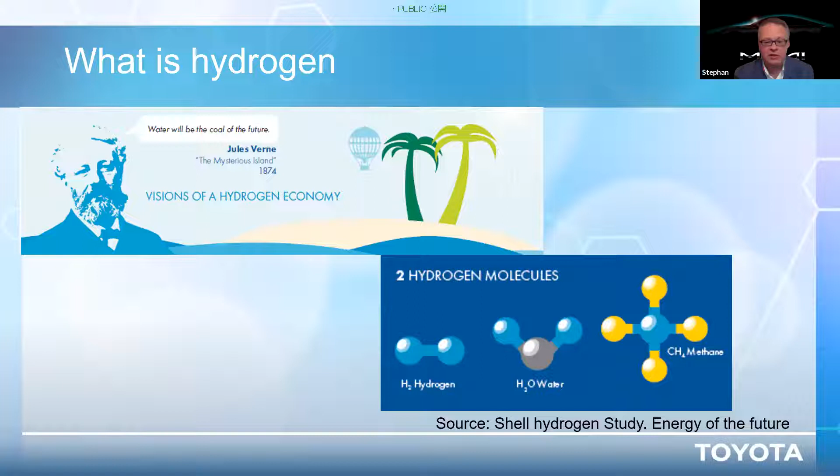Now hydrogen, what is it? As you can see in these chemical elements, H2. You can produce it from water, which is H2O, or from methane, which is CH4. So hydrogen is really plentiful available, and it's the most abundant element actually on Earth. That is why it makes it so attractive to utilize this as a future energy carrier.

When we look into different ways how to produce hydrogen, I will not go into all these pathways, but just to say you can utilize hydrogen by separating the oxygen from water, H2O, through an electrolysis process, which requires electricity, and this electricity can come from renewables, from biomass, or of course also from fossil fuels. Then there is some biochemical conversion possibility based on algae, and the most common, I would say today, is the thermochemical conversion with SMR or other techniques by using fossil fuels, producing a syngas, and out of the syngas hydrogen. So these are in essence the different pathways to produce hydrogen.

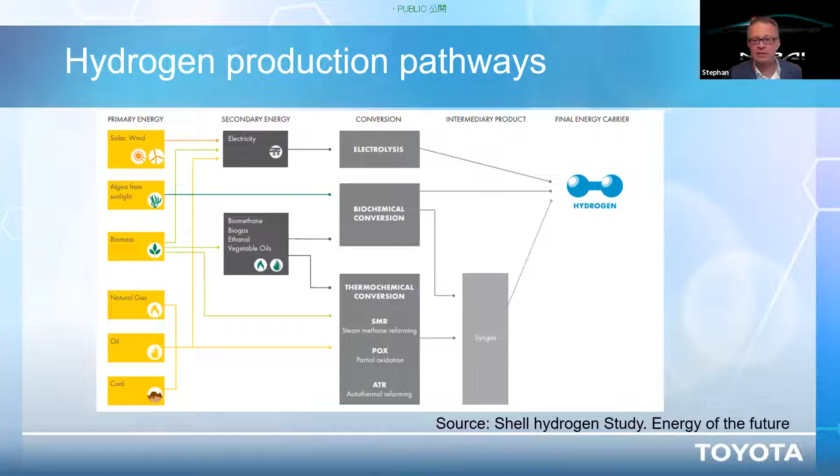What is important to note is that hydrogen is an energy carrier. It is not an energy by itself, it carries the energy, and it releases electricity and power when it reacts again with oxygen.

There are different colors of hydrogen. You might have heard gray, blue, green, red. Gray hydrogen is the hydrogen available today, a large majority. This is hydrogen based on natural gas, on fossil fuels.

Then we talk about blue hydrogen when we use fossil fuels, for example natural gas, but we capture the CO2 out of this process in a carbon capture utilization or carbon capture storage process. Last but not least, green hydrogen is when we really use biomass or green electricity to produce hydrogen with an electrolyzer. And red hydrogen is hydrogen that is coming from nuclear.

In the Hydrogen Council, we have made a forecast about the development. As I said, today mostly gray hydrogen is available, but it's clear if we want to decarbonize, we need to move into a blue and a green hydrogen scenario. And this is what we came up with. Our analysis shows that you could do a completely 100% blue hydrogen future.

There is sufficient storage capacity worldwide available. And you could also do a 100% green hydrogen economy because there is sufficient renewables, sun, space available. The decisive factor is the cost, and it is most cost effective to have a mixed case between blue and green to capture, to utilize the regional circumstances.

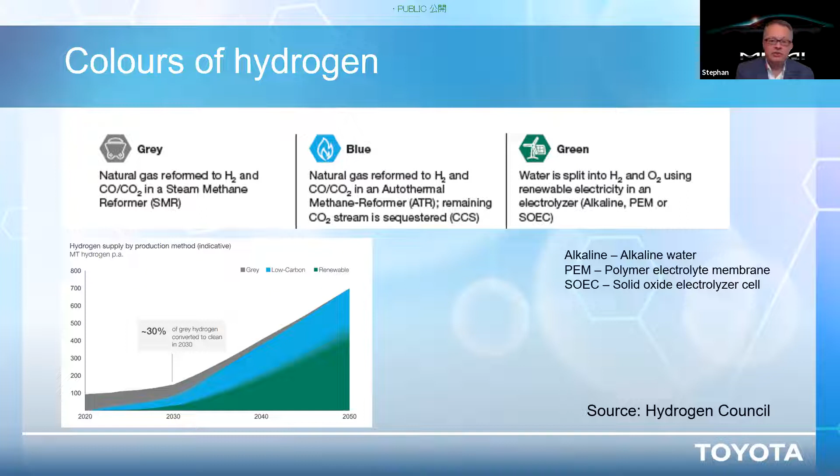If you're in Saudi Arabia, you have lots of sun, lots of space, then green or blue hydrogen might make sense. In other areas, it is more blue or it is more green. It really depends on the energy that you have available.

What are the benefits of hydrogen? As I explained, it has the potential to be zero carbon footprint when it is produced from green or when it's utilized as blue hydrogen. It can be stored, and hydrogen can be transported over long distances, for example from the Middle East, from Norway, from Australia, from Chile. It has a high energy density, up to 100 times higher than lithium. It provides clean power and it provides clean heat. And last but not least, it is also a sector coupling effect.

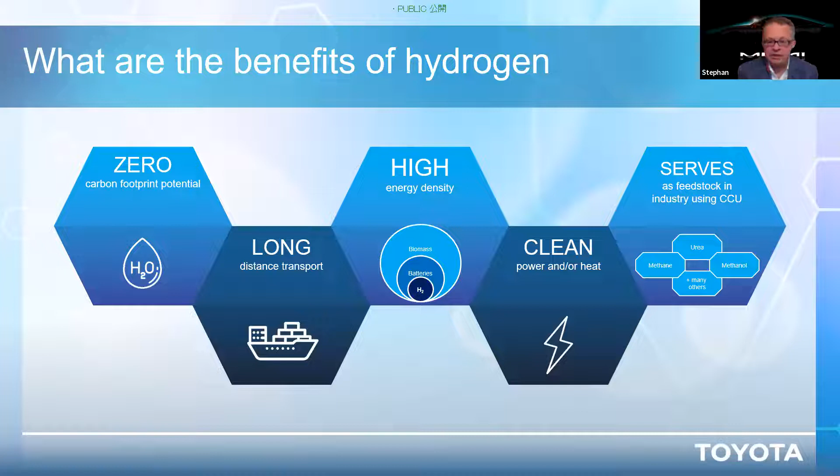It serves as a feedstock in many industries, including carbon capture and utilization.

Now let's move to the vehicle itself. What is a fuel cell vehicle? In essence, it is an electric car because it is powered by an electric engine. The difference to a battery electric vehicle is that the energy is not stored in a battery, but in hydrogen, the energy carrier. We store hydrogen at 700 bar, and you can see here the yellow tanks. The new Mirai has 5.6 kilograms of hydrogen, giving it a driving range of more than 600 kilometers.

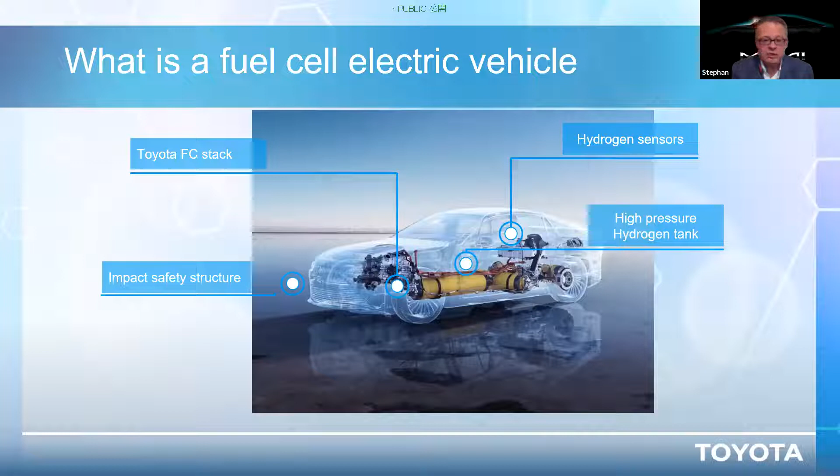Let's look at the difference and similarity between a fuel cell stack and a lithium battery, as you can see here. On the left side is a fuel cell stack. What does it do? It uses hydrogen and utilizes oxygen from outside, which is plentiful available. Hydrogen reacts in the stack with oxygen, a chemical process releasing a lot of heat and electricity, which we then utilize to power the electric motor. On the right side is a lithium battery. It looks similar and the physics aren't so different, but the main difference is that electricity is stored in the battery itself, not externally in tanks, and then utilized in an electric motor.

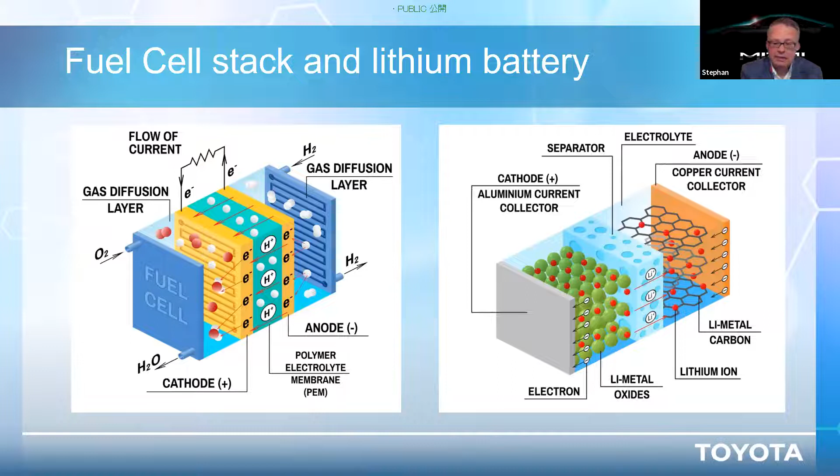Now you can start to play around with these two elements. On the right side is a fuel cell dominant system, where the power for the electric motor comes mainly from the fuel cell. The Mirai has a 128 kilowatt fuel cell providing power directly via a converter to the electric motor. On the left side, we have variants called range extenders, which we utilize for example for buses. Here the main power comes from the battery, and the fuel cell is constantly charging the battery. Between these two extremes, you can play around with battery size and fuel cell size to come to different solutions.

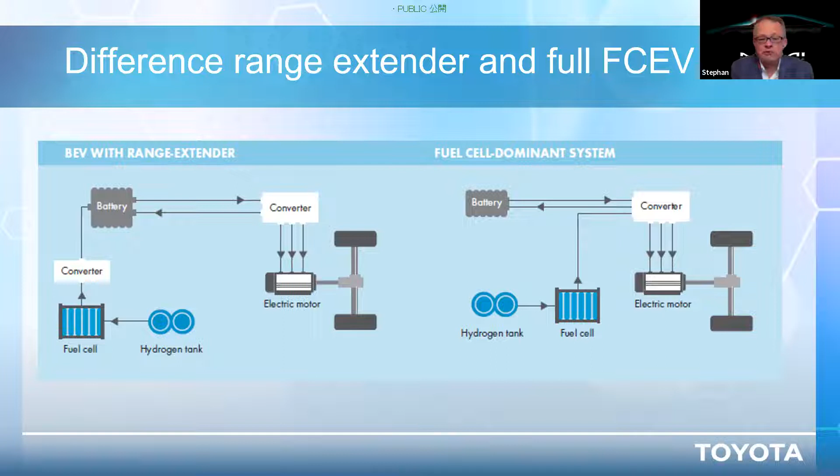Now let's turn back to hydrogen and the complementary role of both. Both have advantages and disadvantages. Hydrogen's disadvantage is lower energy efficiency, and it requires a dedicated infrastructure and distribution network. On the positive side, it has fast charging possibilities. The Mirai refuels in 5 minutes, and the target for buses and trucks is 10 minutes, very comparable with conventional options today. Hydrogen also has high energy per mass, which is why in vehicles where space and weight are constrained, we can store a higher amount of energy with hydrogen than in lithium batteries.

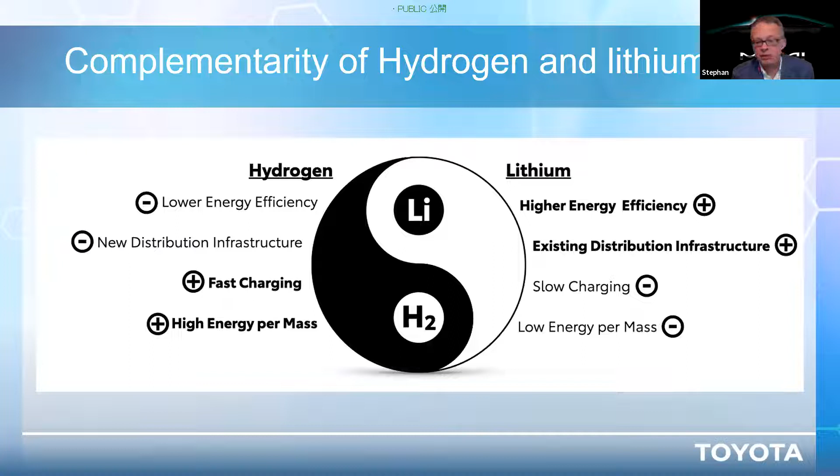Lithium, on the other side, has higher energy efficiency in vehicles, and the distribution infrastructure is easier to realize at the beginning. I say at the beginning because as soon as we go into volume and wider fleet applications, we'll see grid issues and grid upgrades required. The downside is slow charging, and the energy per mass is also lower than in hydrogen. So it's not either-or, it's both. That's the message, and we need to understand customer requirements, whether a customer goes for hydrogen or lithium batteries.

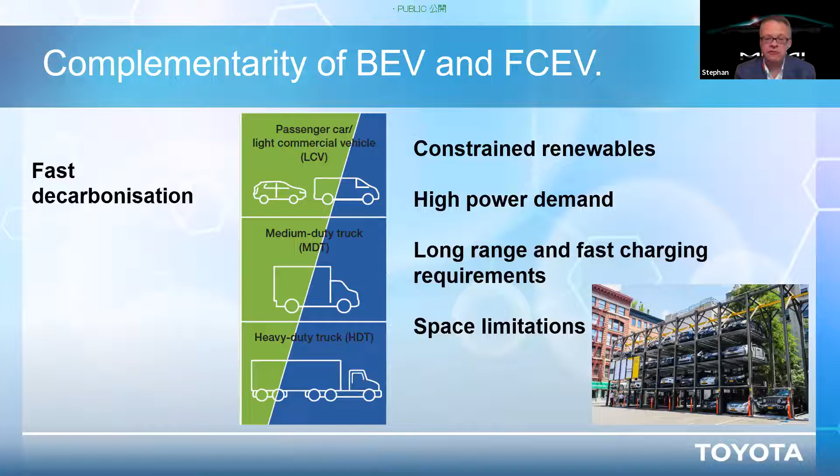To summarize, we just published in the Hydrogen Council a dedicated study on transport. We need battery electric vehicles for fast decarbonization, and they will dominate in many use cases, especially passenger cars, less so toward heavy duty trucks. Fuel cells have a clear advantage when there's a constraint of renewable availability, high power demand—think trucks or buses—or long range and fast charging requirements, such as taxi fleets or ride-hailing applications. Or, as in this picture, simply when there are space constraints that don't allow overnight charging. Here fuel cell has a clear advantage.

Looking at the global picture, we see an environmental revolution going on, also with the results and steps taken in Glasgow. In total, we now have countries representing 75% of global GDP who have committed to zero emissions or who have or will introduce carbon trading. This is a massive trend.

That's also obviously a question: how can we decarbonize transport? The transport sector today accounts for more than 20% of final energy consumption, and even worse, we still depend more than 95% on fossil fuels. So it's a huge challenge to decarbonize this sector.

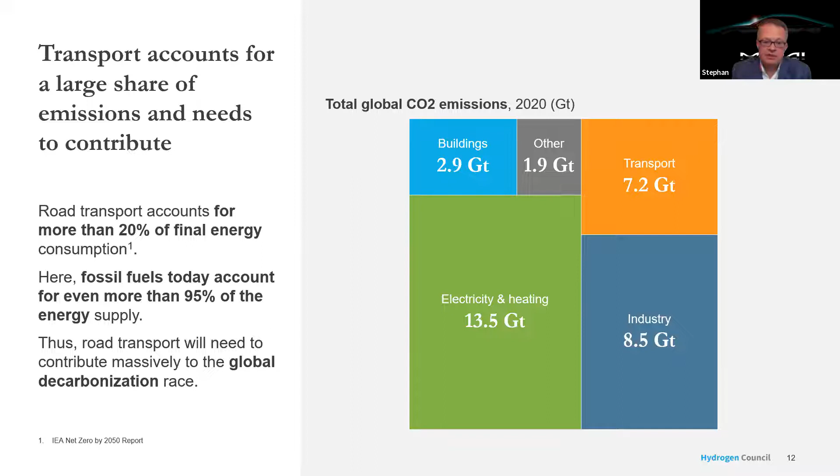Looking forward, we try to make a forecast for what happens by 2030 and by 2050. What you can see on this slide is power in black, mobility in blue, heating, and new industries. New industries is specifically the steel industry, which has increasing interest in utilizing hydrogen. Existing industries is mainly the chemical industry, which uses hydrogen today to produce fertilizer or in refineries.

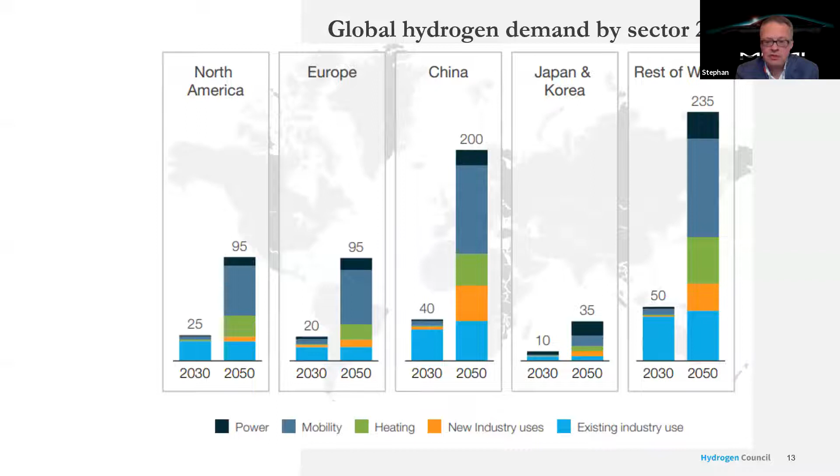Looking forward, what becomes clear is that hydrogen will play a major role in mobility. Our forecast clearly shows that hydrogen uptake in mobility will be quite significant towards 2030, but even more so in 2050. Let's have a closer look at what happens between now and 2030.

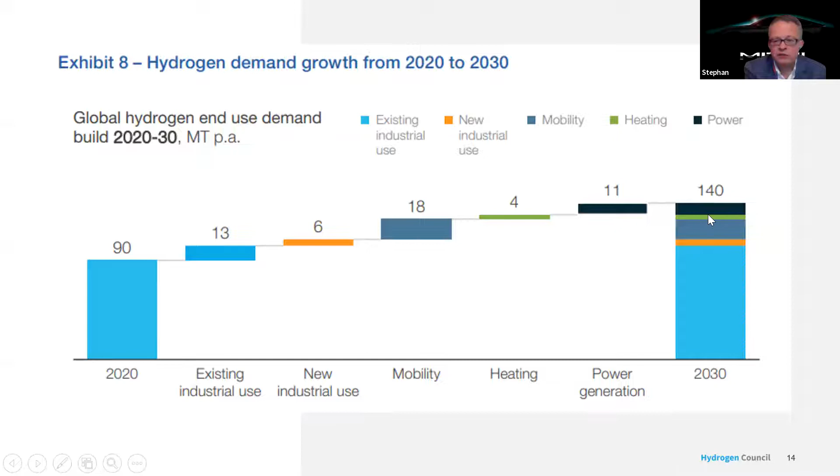The starting point is that today we produce around 90 million tons per year of hydrogen. There will be an increase of existing hydrogen usage - think about refineries who need more hydrogen in the future, then steel industry as I mentioned. Mobility is developing many projects, and then the heating and power sector, leading to a consumption and production of 140 million tons by 2030.

If we look at what is required in terms of global investment to make this happen, here again you see the different sectors and the investment needed for production, distribution, and also for the demand side. What's clear is that for transport, we need almost equal investment in production, but as transport is very decentralized, we also need significant investment in distribution and in setting up a hydrogen network, and then also for the vehicles.

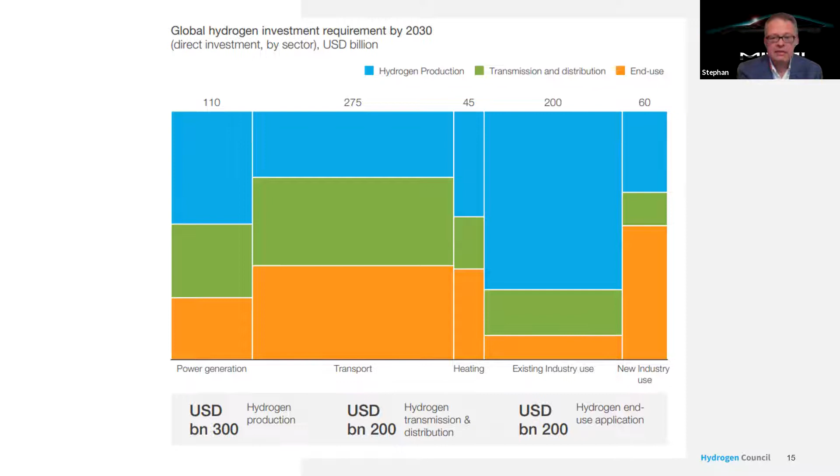We now have the Mirai, the truck - Ash will show you the truck in the US - we have buses, we have vans. We are working on trains with partners, on ferries, on stationary applications. So the number of applications in the transport sector will increase, and hence the investment will also be significant between now and 2030.

But what we also analyzed is how much of this investment is already committed today. As you can see, committed or announced is around $160 billion US, but we still have a significant gap to close to reach the investment needed, which is around $700 billion by 2030 for production, distribution, and end-use applications. So discussions are ongoing.

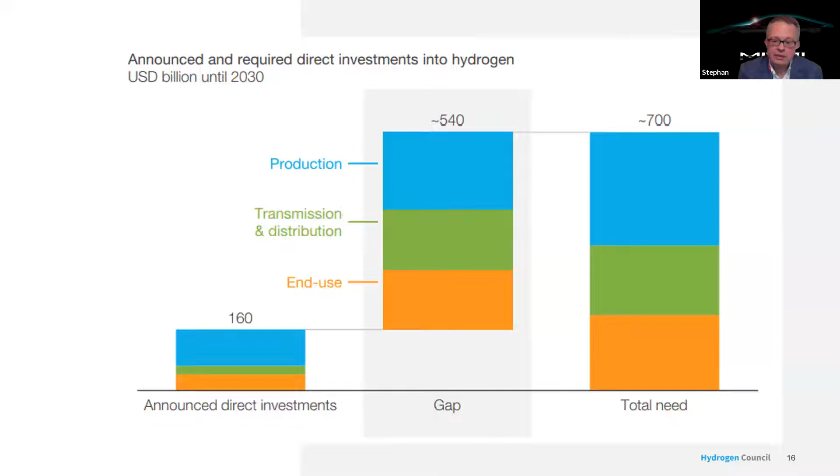European and US have now put big incentive plans for hydrogen on the table to promote this, to stimulate financial mechanisms, and the financial industry is playing a key role in this regard to unlock this investment and make this happen in order to realize the full potential of hydrogen.

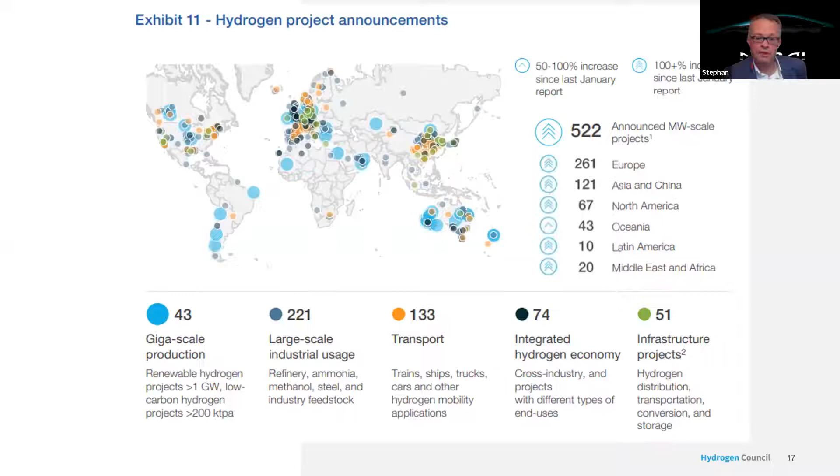And in China. But Europe is currently leading with around 261 large-scale industrial projects currently going on in Europe, for example as part of the so-called IPCEI projects - projects of common European interest. So it is the clear target of the European Commission and many member states to make hydrogen a fundamental part of the new economy, one we'll see decarbonize and reach the Paris Agreement.

Now let me turn towards transport and why we think battery electric and fuel cell have a complementary role to play. We have developed in the Hydrogen Council 12 facts around this complementary role, summarized in 3 areas. We believe in this complementary world we can decarbonize greener, we can be faster, and we can be cheaper.

The key arguments on greener: system efficiency is comparable, life cycle emissions are comparable, there's an additional storage and import possibility to utilize more renewable electricity, and we can actually ease the resource demand for certain materials like cobalt, nickel, or lithium that are required for battery. Faster - we are independent from the electricity mix.

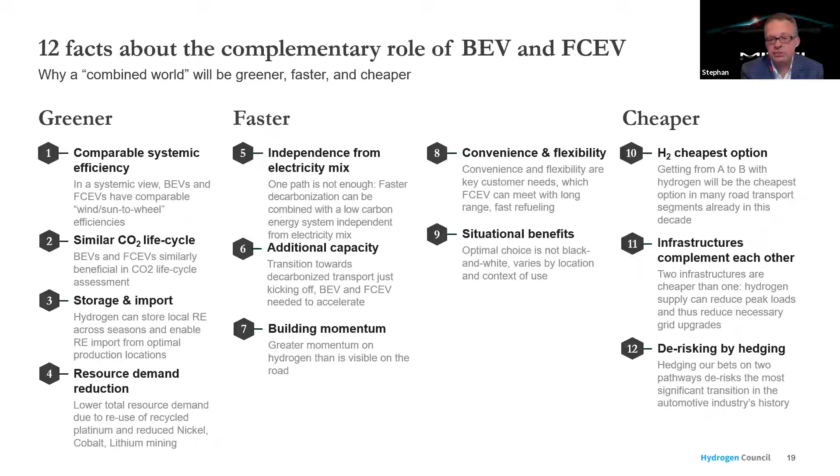We can provide additional capacity for this decarbonization transition, and we can utilize greater momentum by focusing on both technologies, because we can offer more convenience and flexibility to customers, and better respond to situational and regional situations. And cheaper - because hydrogen is the cheapest option in many situations, and the infrastructure can actually be cheaper as one. So let me not touch on all, but just on some selected items.

The first is on efficiency. Let me explain this chart. What you can see on the left side is we assumed the output of a 1 kilowatt solar panel here in Germany or Northern Europe, which has a load factor of 11%.

So the starting point is 950 kilowatt. This electricity we utilize in a battery electric vehicle. We have losses because of the transmission, and around 18% tank to wheel losses in a battery electric vehicle, which gives you 680 kilowatt, which means the car can drive 6,100 kilometers.

The next case is we take the same 1 kilowatt solar panel, but this time in the Middle East. There's more sun, so the load factor is higher, 25%, and our starting point is higher, 2,200 kilowatt. Now we cannot use the electricity produced in the Middle East in Europe, but we can produce hydrogen, liquefy it, ship it to Europe, and utilize it here directly in fuel cell vehicles. You see the higher tank to wheel losses, which we assume here at 50% for fuel cell vehicles, and despite this, we have almost the same driving range as for battery electric vehicles using solar energy from Germany.

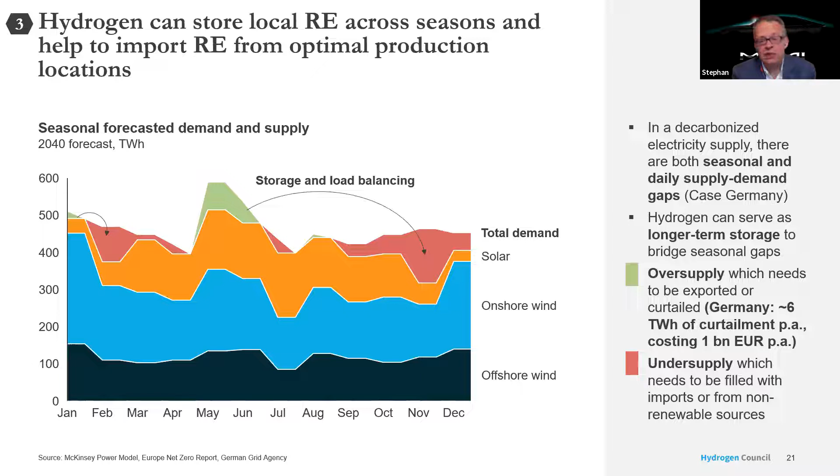This slide is just reiterating what I said about the peaks. When we have imbalances in the electric system, we have green electricity available, there's an oversupply, and this accumulates at the moment to around 1 billion alone for Germany. We also have situations where we need more electricity but there isn't sufficient green electricity available, for example during the night. So hydrogen can obviously help to balance this. We can utilize the surplus, produce hydrogen, and utilize it when energy is required, when there is an undersupply.

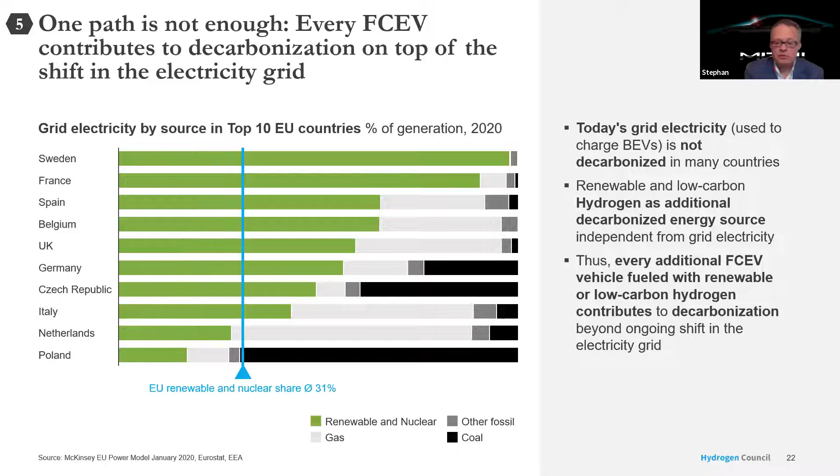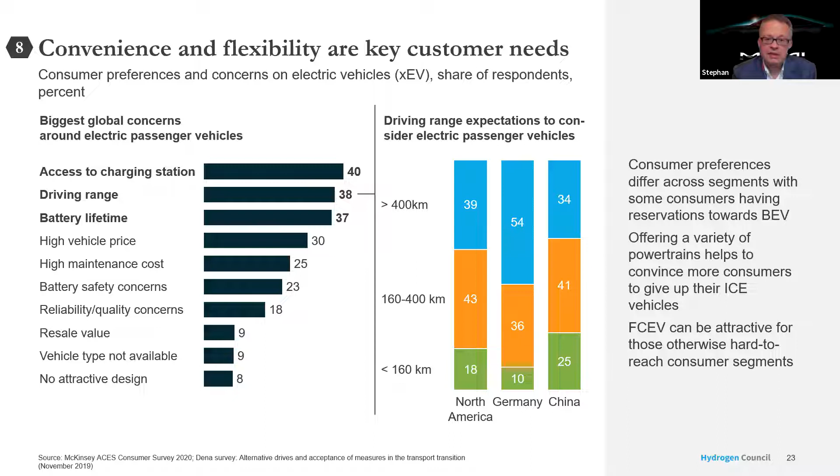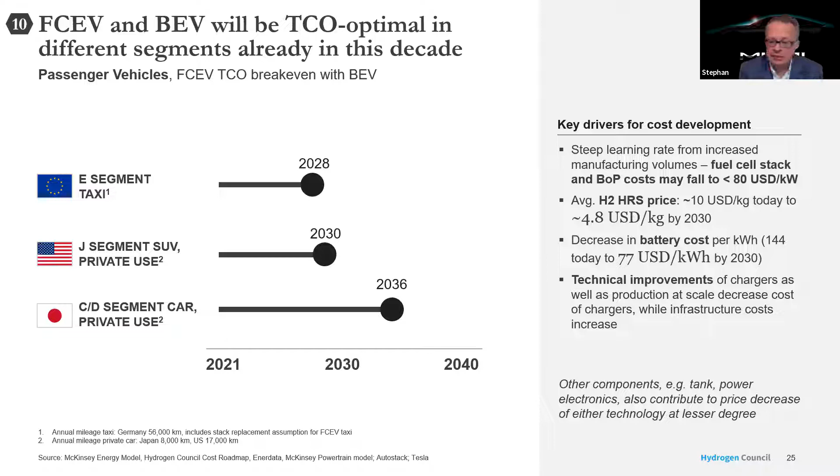I mentioned that two infrastructures are cheaper than one, which sounds a bit strange. But what we calculated is, in a world of the Paris Agreement when we fully decarbonize, for 1,000 passenger cars in a 100% BEV scenario, the investment needed for the grid and electric charging infrastructure is around 5.8 million. Now if we reduce this 100% scenario to 90%, we can already reduce this cost by 1.4 million.

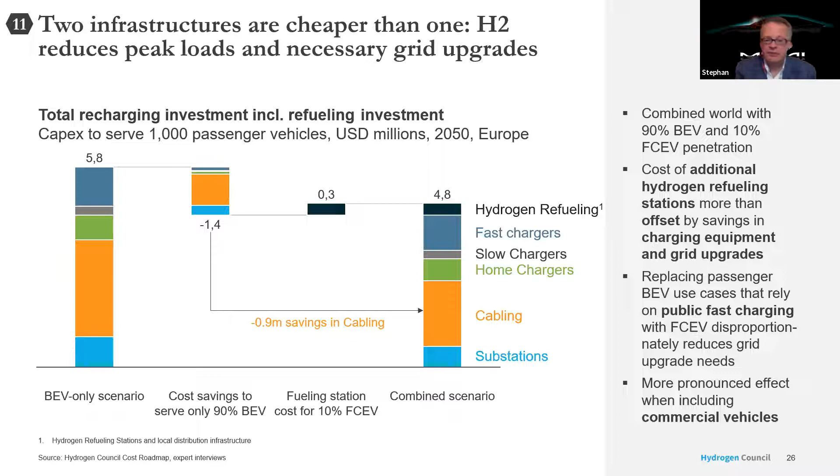Then for 100 cars, by 2030-2050, we assume the cost of a hydrogen station is around $300,000 in total. So if we replace this 100% scenario with a 90% BEV and 10% fuel cell scenario, our total cost is 1 million lower per 1,000 passenger cars than in a pure battery electric scenario. Again, this 90-10 split is just an assumption to visualize the effects. In a combined scenario, we can realize the investment in infrastructure cheaper than if we focus on a singular technology.

That is also true if we look at highway charging requirements. As you can see on this slide, during holidays and weekends the energy demand for passenger vehicles can go up to 4 megawatts. And then if you think about trucks coming, that adds up to another 15 megawatts. So in total, this is a demand equivalent to a town with around 25,000 inhabitants, which puts enormous pressure on the grid if this is fully electrified.

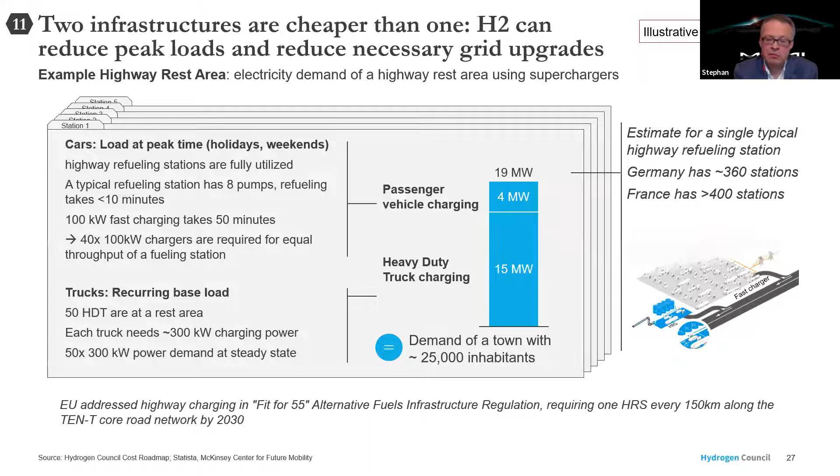While, as you can see on this graph, you can serve the same amount of cars with one hydrogen station and eight nozzles. So in terms of space impact and the electricity and energy we can carry to these highway stations, hydrogen can be complementary and take off the pressure on the grid and the pressure to deliver this amount of pure electricity to highway stations.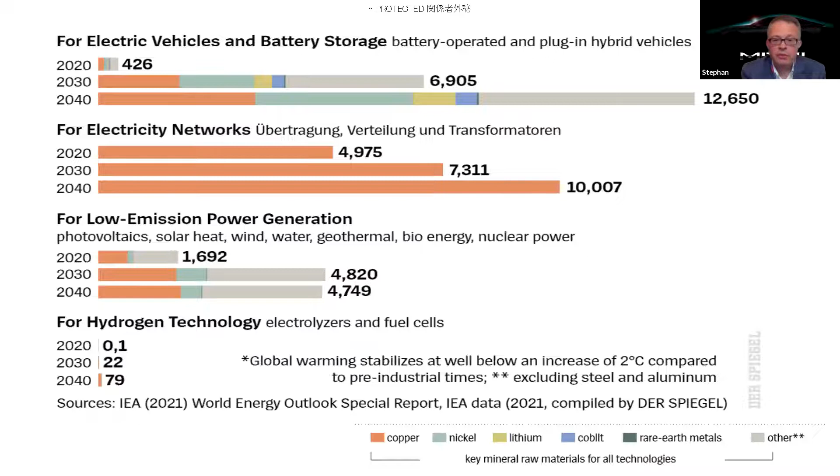What we mainly need is platinum. And we are working towards having the same amount of platinum in the stack as we have in catalysts today, which is around 7 to 10 grams. That means every combustion engine we take off the road, we can recycle the platinum and utilize it for fuel cell production. Therefore, we have much less pressure on other materials and metals with hydrogen. So an important factor as well to keep in mind.

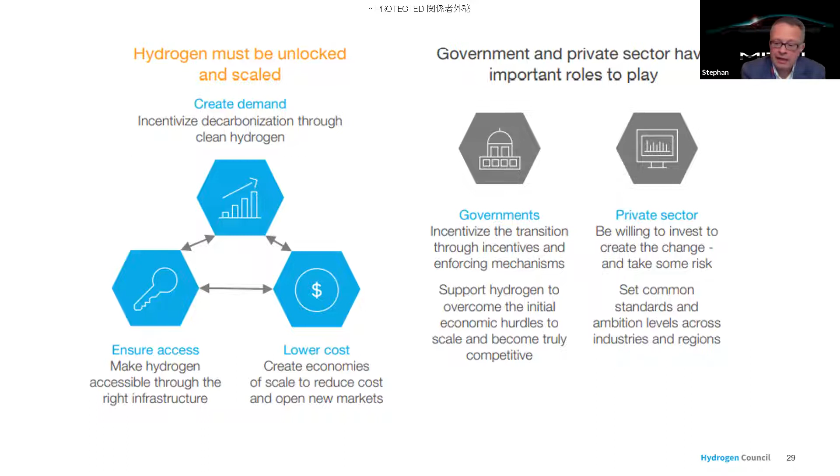Last but not least, in order to fully unlock the hydrogen demand, we need to stimulate the demand, the vehicles, ensure the stations and the low cost of hydrogen at the same time. And in order to do this, I want to give you 4 examples from Europe of how we are doing this.

We partner with infrastructure companies, for example with Air Liquide in France, to create a ride-hailing scheme, now targeting to have 600 Mirais in ride-hailing in Paris. We just started a similar project in Denmark with more than 100 Mirai. We have a partnership with Uber in Germany, and we have introduced the Toyota Caetano fuel cell bus in Europe. We've already sold more than 50 of this bus.

All these examples will help align the infrastructure and the demand in order to achieve our goals in building up hydrogen ecosystems and increasing the uptake of hydrogen. So I'll stop here. Thank you very much. And I hand over to Ash.

Stephan, thank you very much. I thought that presentation was really good about giving us proper context about hydrogen relative to other types of battery technology, and also in the context of developing a clean energy infrastructure, what it will really take. So we appreciate that. To all our participants, thank you. We've got over 10 questions so far, all of them very good. We're going to hold off in asking those questions until Ash is done presenting, just because some of the questions I believe Ash will answer in his presentation. And again, we'll give a chance for both panelists to answer at the end.

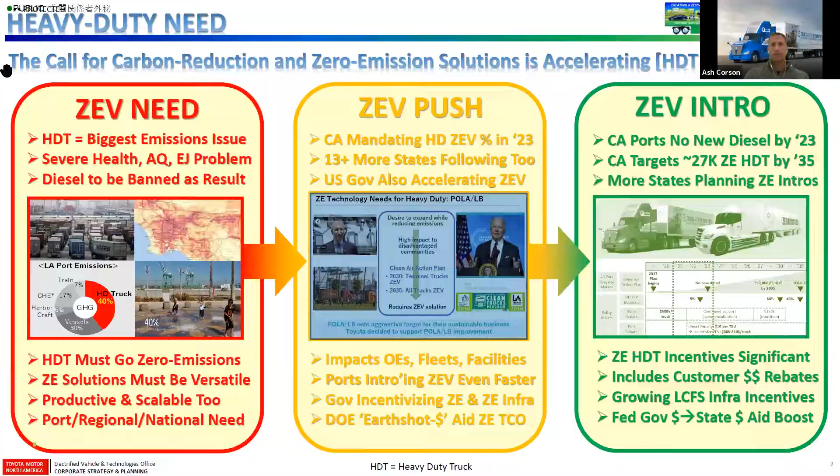This, visually, helps portray a lot of what Stephan mentioned in terms of our portfolio approach and belief. As I mentioned, one size does not fit all in terms of electrification, because each customer or ecosystem has a different situational context of needs, energies available, and operating cycles.

So really everything is needed. We need battery electric vehicles that are good for shorter range, fixed route, lighter cargo. In the middle, we need hybrid electrics, a great mid-range solution which isn't infrastructure dependent, right? We have existing gas grids and electrical grids, and we need to leverage those in this energy transition. It's not simply flicking a light switch and converting everything over to electric. That would cripple the electrical grids, and everyone has existing assets they're invested in, whether you're a truck operator or a port operator.

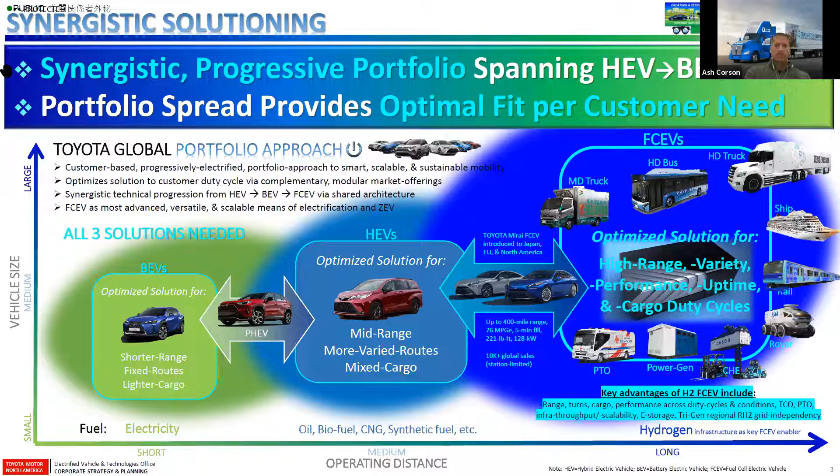The bigger blue space you see, again, the bigger the need for electrification, the better the scale fit for hydrogen fuel cell electric. That's one of the reasons across trucks, buses, ships, and power generation, we're heavily advancing fuel cell electric.

Hybrid, I think everyone's quite familiar with this. A key point, that second bullet up at the top, it's infrastructure independent, and it gives the customer flexibility. So if you're a customer who lives in an apartment building without direct garage charging for battery electric, that's not going to be easy for you. Or you're in Wyoming, for example, where there's not a lot of fast chargers or any chargers, and it's quite cold, which can reduce battery efficiencies by 30% or more, really cutting into your range. And fast charging alone tends to reduce the performance of battery over time.

So hybrid electric is still a great option to reduce carbon at a big scale, and we'll continue to leverage that. Battery electric does have a great place for urban mobility, shorter range, lighter duty cycle, personal mobility. We're pursuing that in alignment with the regional infrastructure, and now that the renewable pathways are more clear and available, the time is right for that as well. We're doing that in partnership with many other stakeholders.

In this fuel cell electric space, a lot going on here, but as you look left to right, you see the progression from passenger vehicles, our very first generation Mirai up at the top left, and the second generation beautiful new Mirai that we introduced, and then towards the heavier duty aspect, the trucks, buses, and planes, trains, and ships. The bigger the scale, again, the better the fit. That bottom right pictogram just represents port handling equipment, trains, ships, air, right? There's global investment and R&D ongoing everywhere.

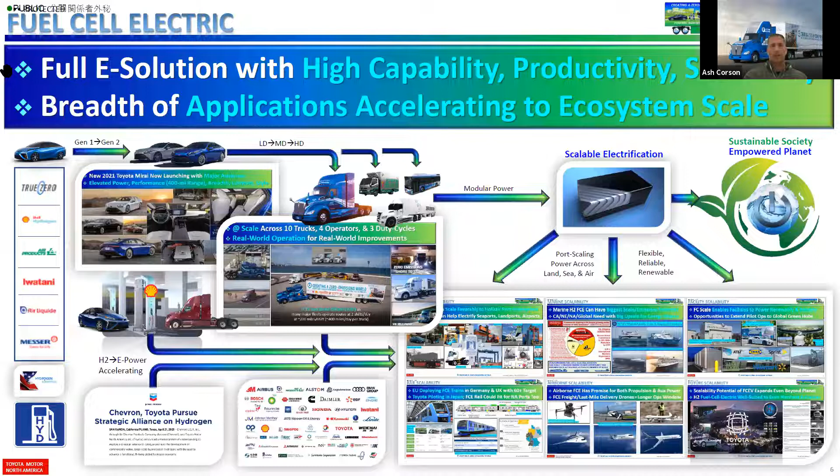It's really a modular, scalable electrification. I won't touch too much on this because I think Stephan covered it well, but the complementary role of battery electric and fuel cell electric, where one is strong, the other may be challenged, and vice versa. So it's good to have both in the arsenal.

Stephan mentioned, I think, maybe 600-kilometer range, which is about 400 miles for our US lens. Recently, just out of my office here, we had a hypermiler come in and see what they could do with one of our new Mirais. The EPA label is 402 miles, and we set a Guinness Book of World Record for 845 miles on one single tank. So that was pretty cool. It just illustrates the high range potential of the technology.

Using the heavy-duty truck lens for the reasons I described, as a comparison against some of the pros and cons of battery electric on the left and fuel cell electric on the right, both electric solutions. As Stephan mentioned, fuel cell electric simply uses electrochemical reaction to make its electricity on board via a feedstock of hydrogen and oxygen coming into the vehicle. The hydrogen is stored on the vehicle in those high pressure tanks you saw, and the oxygen just flows through and is used with a compressor to accelerate the speed of it. So it just comes in from the air, and the only emission is water, and you get a lot of benefits, as you can see from the bullet list there.

In this heavy duty truck space, it's really a much closer capability-wise diesel equivalent, which is the benchmark for today's diesel trucks. One of the big challenges is all those diesel trucks, the emissions, as I mentioned, is brutal. It's a real issue. I think we've all been there when following a truck and seeing the soot come out of it, the particulate matter. It's not just an emissions issue though. There's so many benefits to going electric and fuel cell electric in this case. There's performance advantages.

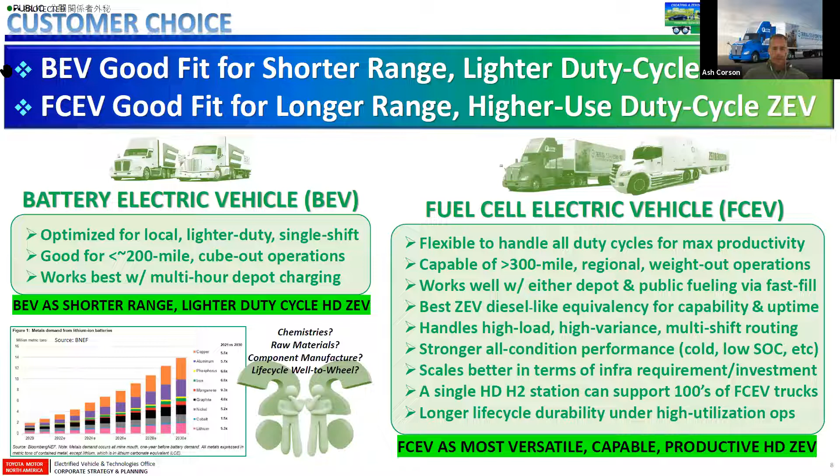In terms of the sourcing of precious metals and materials, the chart you see is the lithium battery example. Stephan made a great point that vehicles already have platinum in there, which is the biggest precious metal ingredient for fuel cell electric, for the cells themselves. That's already used in catalytic converters. So the ratio of conversion, using the equivalent platinum, into a zero emissions vehicle is a great path. Whereas a lot of the copper and nickel and other things, and lithium itself, that are being sourced for pure batteries is a tough thing, because a lot of those areas are in conflict zones.

The key, as you probably well know, and I can't underscore enough, is really the infrastructure. The vehicle side technology works great, whether it's a passenger car, a big truck, or a ship - the unlocking pacing item is definitely the infrastructure. The good news, as Stephan mentioned, is that the throughput for a single hydrogen station is much greater and requires a much smaller footprint than the equivalent charging bays you'd need to service the same amount of vehicles or power generation.

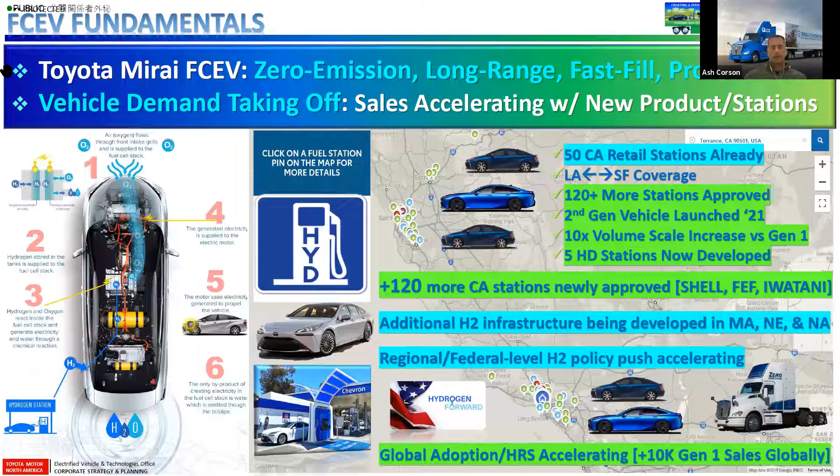Really what it boils down to is concentrated port ecosystems, those universal ecosystems I mentioned at the outset, whether it's a seaport, an airport like Logan or LAX, or a land port, the huge distribution hubs, the Amazons, the UPSs, the FedExes, the Walmarts. They're giant warehouse distribution centers, or essentially land ports serving thousands of trucks. So you really only need to locate a few big, high-scale, heavy-duty hydrogen stations, like we're showing here in Los Angeles, and then you can support the entire ecosystem.

I won't touch on this much, but just to show the scalability, we took two of our passenger vehicle Mirai systems and scaled them up to a Class 8 truck and buses and other vehicles. So modularity is great, and the plug and play aspect is really great. You don't have to reinvent the wheel, the entire truck in this case. You plug and play the powertrain into the vehicle.

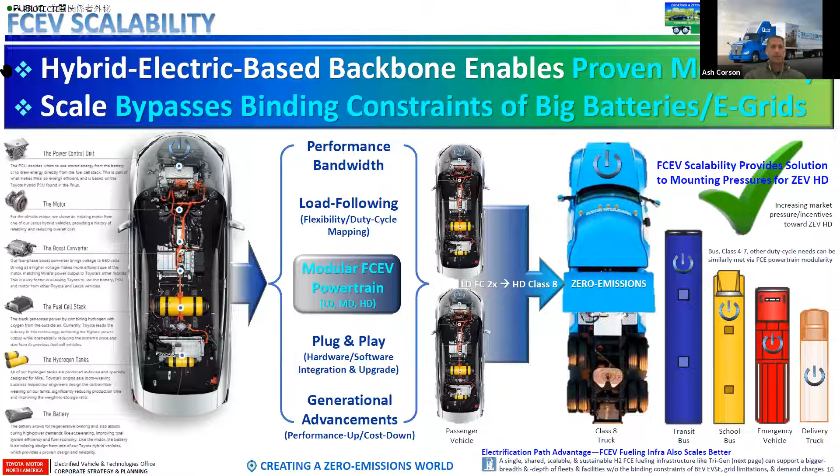Our truck progression here in the US, back in 2017 we introduced Alpha, which had about 200-mile range, at 80,000-pound combined weight. So this is a truck at full load, 200 miles. Then Beta we introduced in 2018, much faster development time, much lighter weight, 300-mile range, a 100-mile range bump up, same wheelbase, but we had the sleeper cab, etc. So you can see the rapid pace of the improvement.

And the Ocean program, we're running with the state of California, Shell, Kenworth, and others, UPS, and our own Toyota Logistics Services. So we've got 10 trucks now with thousands and thousands of in-service green zero emission miles, which is great progress.

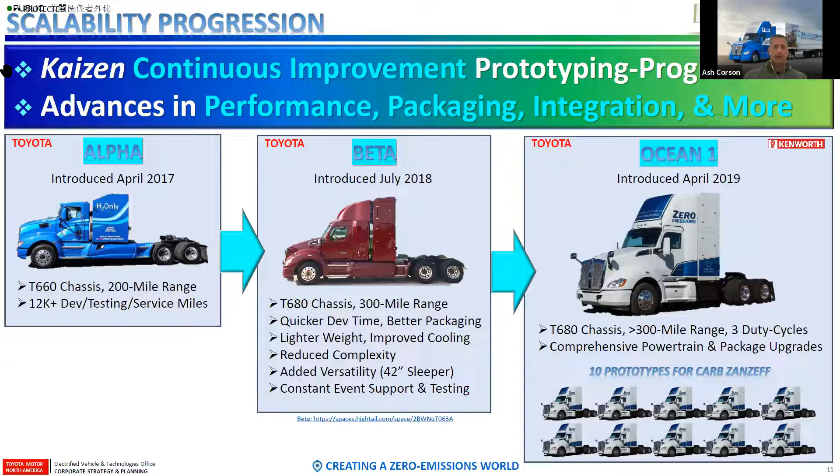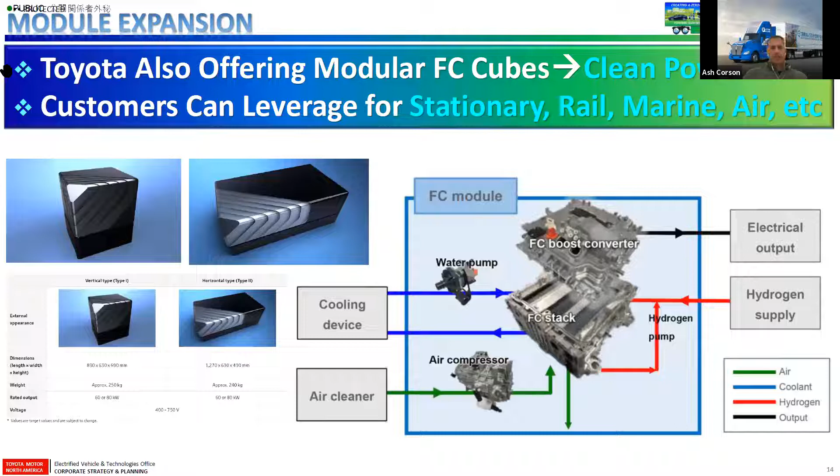We've already tested these trucks at altitude. We're already into our second generation truck development and announcing the partnerships, as I mentioned, on the infrastructure side, which are the key enablers. The modularity is, in short, think of them as Legos in many ways, that you can stack and daisy chain together. The Mirai uses one stack. The Class 8 big semi trucks use two stacks, and then you can imagine for ships or data centers you just have more stacks together. So it's a very promising technology for that scalability, not just on the infrastructure side in terms of throughput, but also the technology itself.

This slide really gives you a picture of what we're doing as Toyota to show the way. Infrastructure is an expensive investment, so collectively, whether we're an institution, a private citizen, or a government, how do we electrify? What makes the most sense to transition to zero carbon neutrality based on our energy profile, our needs, and our situational context? Again, how do we electrify? You really need a future-proof, one-stop, versatile green infrastructure.

This tri-generation plant is an example of us as Toyota introducing this into our Port of Long Beach facility. It will be Toyota North America's first 100% renewably powered facility. It uses a giant stationary fuel cell and biogas to produce renewable hydrogen for fuel cell electric cars and trucks, renewable electricity for battery electrics, and heat for the facility. That renewable electricity can also be used to power not only the facility, but also export back to the grid, so it's a grid strengthener.

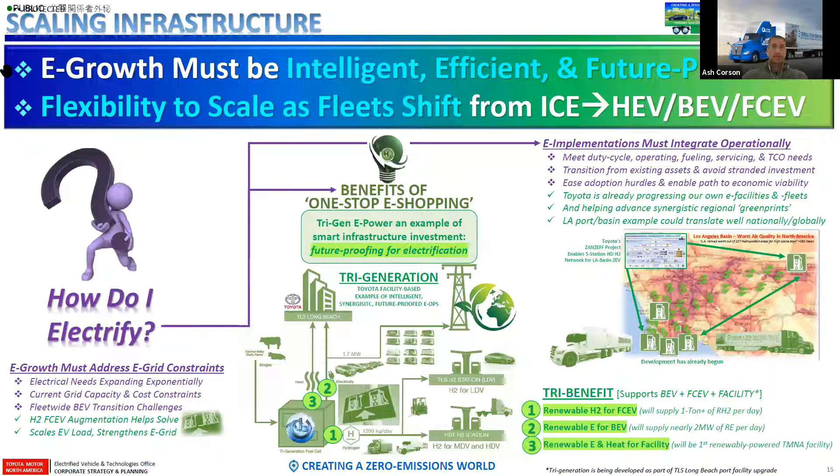Grids are vulnerable, particularly at scale, and a lot of investment needs to happen. Hydrogen can not only be used as energy storage for the renewable cyclicality that Stephan outlined, but also to directly transfer clean energy to the grid, strengthening it.

Just a quick example of the fast growth rate of the heavy duty truck space, accelerating the station count. Those 50 stations I mentioned before are all light duty. Now there are already 5 dedicated heavy duty stations in California, and that's quickly going to more than double in the next couple of years.

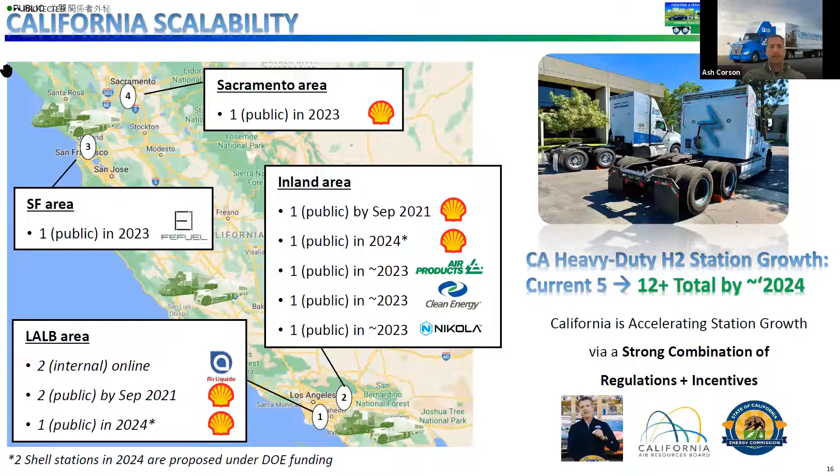As I mentioned, energy providers see this segment, heavy duty trucks and beyond, as the key scale economy motivator. What does that mean for the rest of the country? The green states are ZEV states, including your neck of the woods, which is great. The ones outlined in red are also the ones where it's not just light duty passenger vehicles that will be mandated to be zero emissions, but now the heavy duty truck space as well.

In blue you see some of our Toyota footprints reacting to this and helping lead the way, including what we publicly announced in the middle of the country at our biggest plant worldwide, all of Toyota, our Kentucky plant. That's where we're producing these Class 8 fuel cell electric power generation modules. So that gives you an indication of the importance and activity in this space.

Last couple of slides, this is also indicative of the general US hydrogen progression picture. I think Stephan had a great map of the globe with all the bubbles taking place and growing, and the same is true in North America. This is part of the Build Back Better initiative, the Biden administration, the federal administration, and the various states. There's a lot going on and it's starting to be linked together.

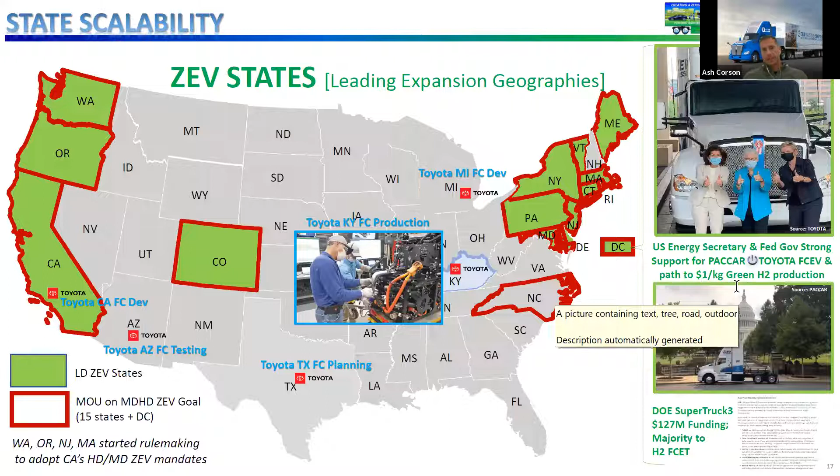I didn't mention the hydrogen shot. This last slide shows Secretary Granholm in front of one of our trucks. The hydrogen shot is really important because that's Secretary Granholm and the DOE's commitment to helping fund $1 per kilogram green hydrogen production within the decade, by 2030. That's huge. The momentum and tipping point have been reached, and part of the reason is this heavy duty truck lever. I think it was quite notable that the very first energy shot was a hydrogen shot. That speaks volumes.

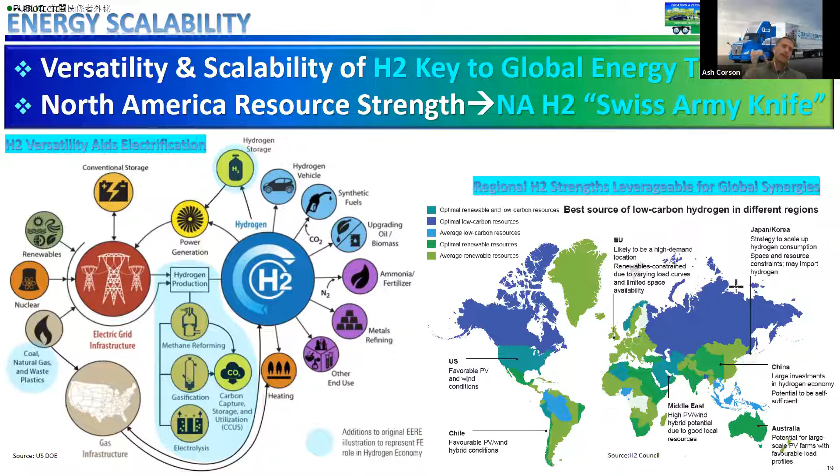Last three slides, quickly. The wheel chart on the left, another great DOE chart, shows the Swiss Army knife-like versatility of hydrogen. I won't delve into that since Stephan covered it well, but we really need to leverage the electrical grid and strengthen it, increase resilience, and leverage the gas grid and carbon capture pathways to blue hydrogen, and also leverage green hydrogen. The great news on the right is that the US is really well situated, whether it's favorable solar and wind conditions, the highly developed natural gas industry, or carbon capture pathways. Then there are electrolyzers at scale, another reason the trucks are important, finally giving the cost economies and scale needed for large scale electrolyzer production.

There's a little visual representation of the global picture too, just to complement Stephan. So lots of activity. The key big takeaway again is that the tipping point, the global momentum, has really been reached. The easy example is always China. They reach scale challenges quicker than anybody arguably, so they're trying to electrify and have pivoted hard to have a good balance of both battery electric and increasingly fuel cell electric, because they recognize hydrogen is really needed to tackle these harder to abate, concentrated port areas. As a result, lots of stations are popping up along with the mobility needs.

This just sums up why multiple paths are needed, that portfolio approach. You need synergy between hybrid electric, battery electric, and fuel cell electric technologies. On the left you have that diversity of customer needs, the transitional needs we've talked about. We also have the flexible future-proofed infrastructure as a core of that, with communication and integration between the infrastructure, vehicle to everything (V2X), and the vehicles themselves. Then what that means for carbon neutrality goal pathways on the right is that all these various technologies are needed and provide different strengths. Hybrid electric gives you that independent, flexible transitional scale. Battery electric gives you more human scale, and fuel cell electric gives you clean, capable commercial scale and real empowerment.

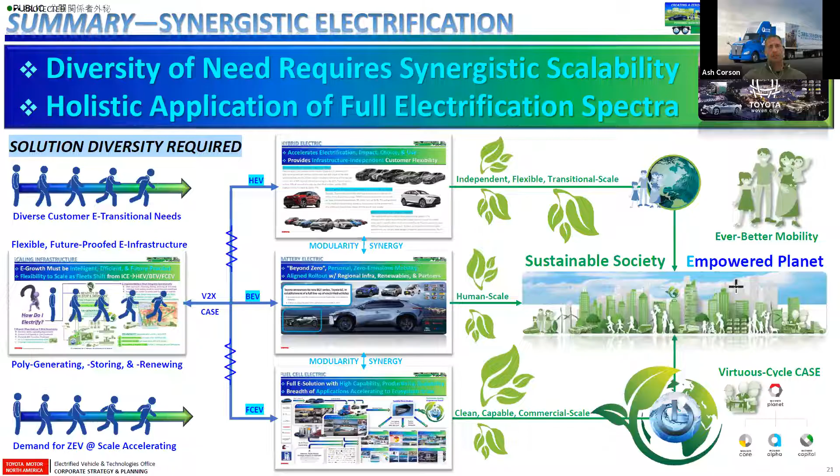I think we look beyond mobility and start thinking about empowerment, whether that's clean power, actually giving communities the tools they need to make this transition. So thanks so much. I will turn it back over to Eric.

Wow, thank you, Ash. That was a phenomenal presentation. I think I'm probably reflecting the attitude of a lot of the listeners, which is really just overwhelming support for all the information that was taken in. There was a lot to take in. So Ash, while we give you a second to catch your breath, we have over 30 questions by my last count. So I don't know if we can get to all of them, but some of them have some overriding themes.

Before we get to specific questions for our two panelists, there were a couple questions regarding, in the United States, Stephan, the current infrastructure bill that was just recently signed into law, I think yesterday, by President Biden. There's a question about how much of it is being spent on hydrogen. And maybe Ash, you can confirm this, but I saw a number while you guys were speaking, 9.5 billion is dedicated to hydrogen in the United States right now. 8 billion is allocated towards creating a national hub for hydrogen infrastructure development. And then 1.5 billion is dedicated in this infrastructure bill to some green hydrogen pilot projects in the United States. So Ash, I don't know if you've seen anything different, but that was the one number that came across in my very quick research while you were speaking.

Yeah, that's well said, Eric, and well encapsulated. The only thing I'd add is I think there's the potential for even more. Part of the infrastructure bill gives awards to regions, so the Massachusetts region, for example, or the California region. So it's up to those regions to also figure out what the mix is between the various energy needs and sources of mobility. A lot of those regions, from what we've seen, in their green prints, have hydrogen as a bigger component.